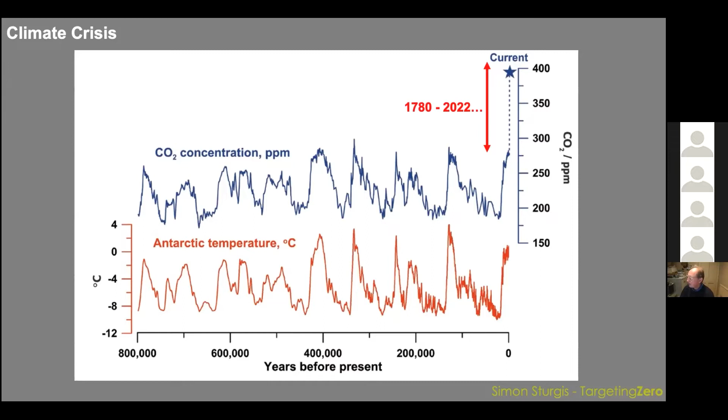So you can see why there is genuine concern, and why we're having the things that we're having happen, because CO2 is out of control, and it therefore seems likely that temperature is going to be out of control. So the objectives of COP to try and stay within 1.5 degrees are extremely serious and are linked to carbon. As I showed you from that picture, this goes back to the Industrial Revolution.

So what is interesting is you look at this magazine here, which says Extinction on the cover. And if you read down below that, it says what's now at stake is nothing less than everything.

COP26 cannot become another vanity exercise, because hope is eternal, but time is not.

Now, the interesting thing is that this is not something published by Extinction Rebellion. This is published by the Financial Times Weekend magazine. For those not in financial services, the Financial Times is published as a weekday newspaper on pink paper, but it's read by the financial services industry, by people at the top of governments and finance ministries. This article was only about 11 days ago, 31st of October.

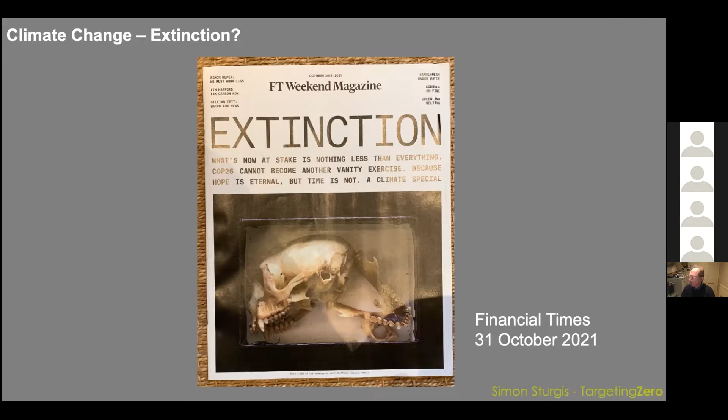And then this is also from the Financial Times. It says, 'We can't get to net zero by flipping a green switch. We need to rewire our entire economies.' This was said by Mark Carney, who was governor of the Bank of England, so he was in charge of all our money. If he's the arch money man, capitalist, whatever you want to call him, he is saying we need to rewire our entire economies.

What does that mean? For me, it means the model on which our society works from an economic perspective is broken. It's not just people like Extinction Rebellion pointing this out, and this is not somebody from the left of politics. This is a central banker, the man who is running our money, saying we need to rewire our entire economies.

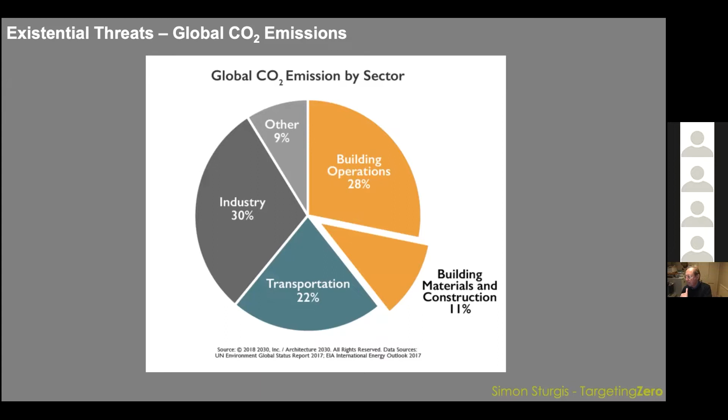And of course, the people behind Insulate Britain are trying to do their best in terms of fixing these kinds of issues, particularly building operations.

Now, one of the things I'm involved with is the Whole Life Carbon Network, which I chair. It's a group of people. What we've done recently is try to define what net zero means. We've produced definitions, trying to get better consistency in whole life carbon reporting. And that is leading to the Royal Institution of Chartered Surveyors' whole life carbon assessment in the built environment document produced by the RICS, which is in the process of being updated.

And what this is all about is improving the way we calculate embodied carbon, whole life carbon. And of course, if you measure something, you can then understand how you reduce it.

That is the objective. So what is net zero? A net zero carbon asset or building is one where the sum total of all asset-related greenhouse gas emissions, both operational (energy) and embodied (materials), are minimized, meet local carbon, energy, and water targets, and with residual offsets equal zero.

So what this is saying is all carbon emissions related to building need to be brought down, and then with residual offsetting equals zero. I'm going to come back to that residual offsetting thing.

So if you look at this diagram, on the left you can see the makeup of a building, the energy and carbon emissions over a 60-year period. You've got primary structure at the bottom in dark blue, services in red, then cladding, interior fit-out, and energy in use. All of that added together is what it costs over 60 years in terms of carbon emissions.

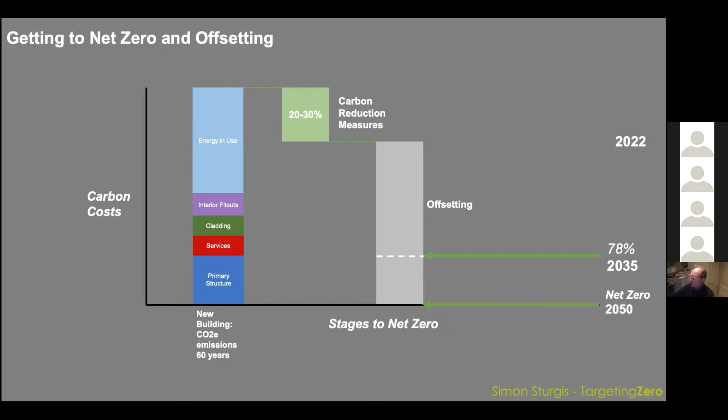But what this is also saying is that if you get that 20 to 30%, which is quite a small proportion of the total column, the rest is offsetting. By 2035, on the right, you can see 78% of that gray column has got to be offset, and the full amount has got to be offset by 2050. So that's a lot of offsetting.

But if you look at these people, these are the Indigenous Environmental Network. They are not happy about carbon offsetting because carbon offsetting has a lot of consequences. It's also, in a sense, ducking the problem, in my view. There are people who sell carbon offsets who have very good explanations as to why it's a good thing, but I think it's to some extent masking the problem.

And if we take account of what the Indigenous people and others are concerned about, we should be really carefully thinking about recommending offsetting in any way.

And this is what came up after the First World War. So within only a few years of that, within a decade of the end of the First World War approximately, you're getting a new architecture which is radically different. I'll come on to a slide which explains it, but it's very different from the previous architecture, the pre-First World War architecture, the end of the 19th century. And that architecture evidenced in these images has really come out of the demands of the day.

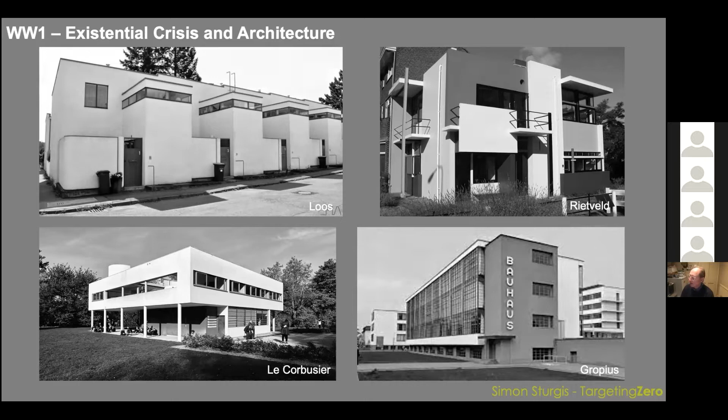And of course, you could say that today, the consequence of climate change is leading to the kind of destruction we're starting to see, that is beginning to mirror - not necessarily as extensively, but potentially far worse than what happened during either of those two wars.

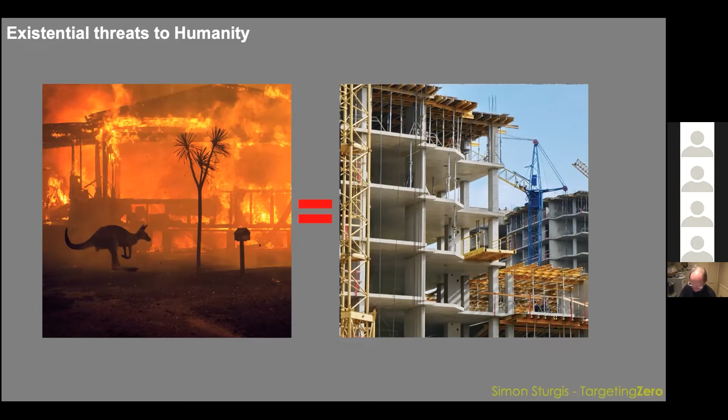And if I go one step further, what this is saying is that the construction we're having today is contributing to climate change, and is directly contributing to what's happening in the image on the right, which is contributing to what's happening in the image on the left. And therefore, you can make the direct correlation that building buildings is not dissimilar, in terms of existential threat to humanity, to driving a bomber.

That may seem a bit extreme, but I think you can draw parallels given the fact that construction and the built environment is responsible for something like 40% of global emissions. It is not an unreasonable point to make that there is an equivalence, if you like.

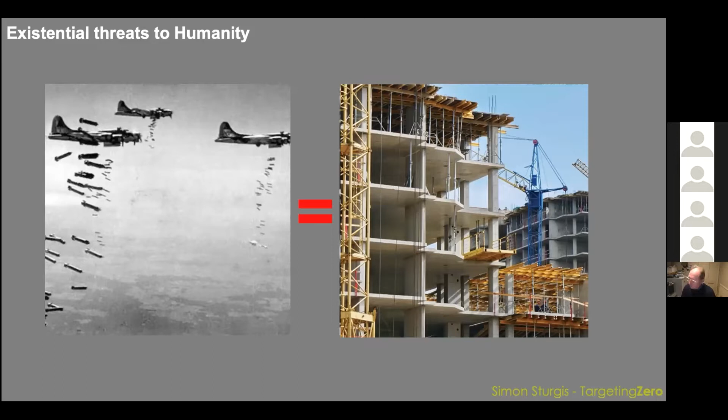I know I'm stretching a point and collecting up dots that are loosely affiliated, but I think there is a point to be made that the seriousness of this is such that there is a level of equivalence. And if you look at the nature of the problem, global construction from 2020 to 2060 - so for the next 40 years - is equivalent to one new Greater Manchester every 9 weeks. That is a phenomenal amount of construction, and that's what we're having to deal with.

Now, you might say we have to put a stop to that. But yes, we have to retrofit - I'll come on to the retrofit issue in a minute. I think we also have to recognize that population is growing, whether we like it or not, and population is part of the problem. Consumption is growing, and people need to be housed, people need somewhere to go and work, and so on. So whether we like it or not, buildings are going to continue to be built, although, as I say, we want to be retrofitting. So what do we do?

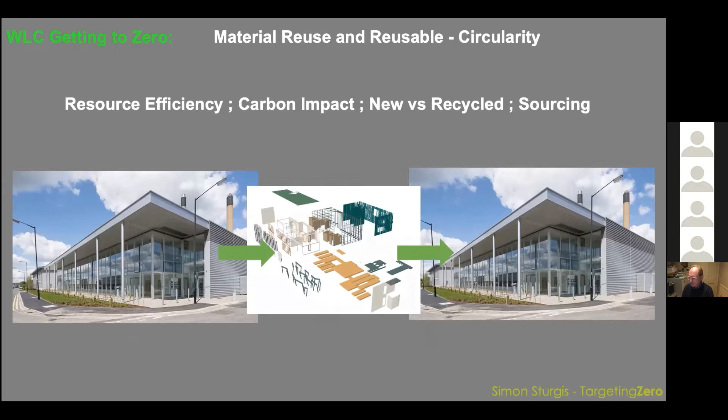Now, if you anodize aluminium, you have to have virgin aluminium. It has to come from a mine, a bauxite mine, somewhere like Australia or wherever, because if you use recycled aluminium for anodizing, you tend to get colour variations and so on. So what I'm making the point here is that something as simple as a coating, a choice of coating, can make a difference to what the substrate is, and therefore whether something's recyclable or recycled or not.

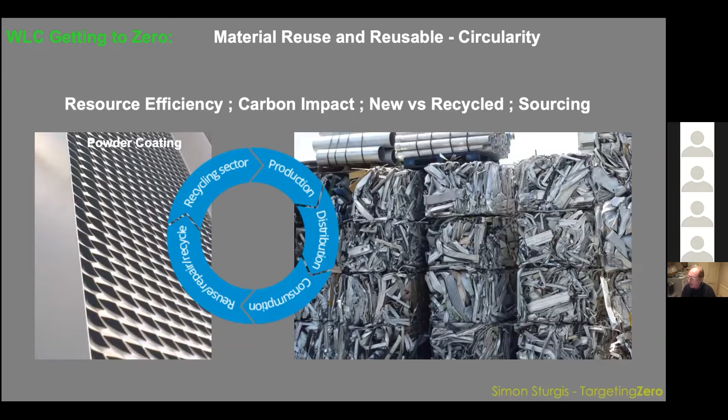So it is really important to think about this holistically again. It's not just about the finish, it's also about how you get there. I thought I'd just show you two things I'm involved with.

And there's a clear case to be made. But people have to change their mindset, and it comes back to that point about changing the economic model. We also need to change our mindset about these sort of things.

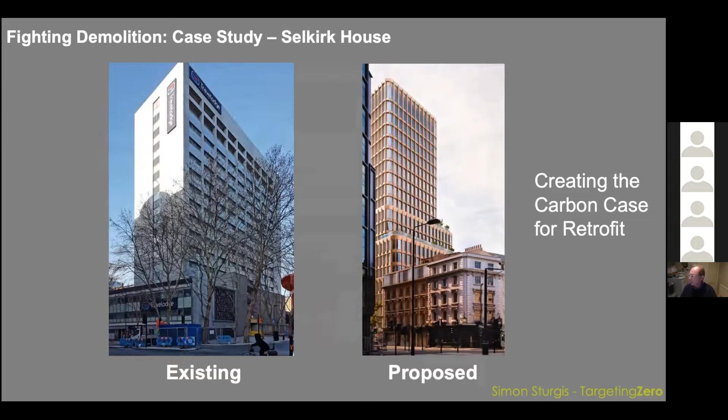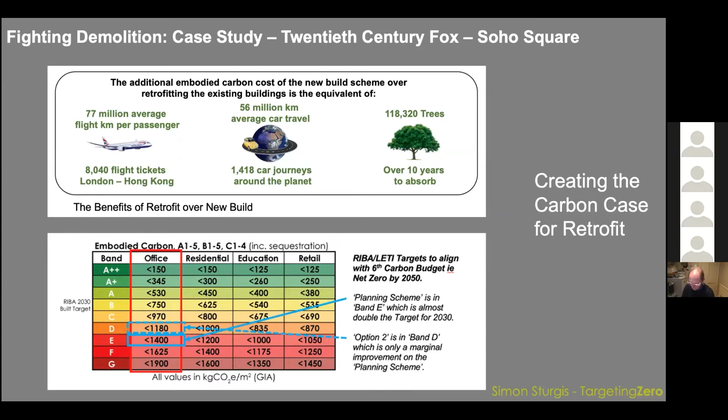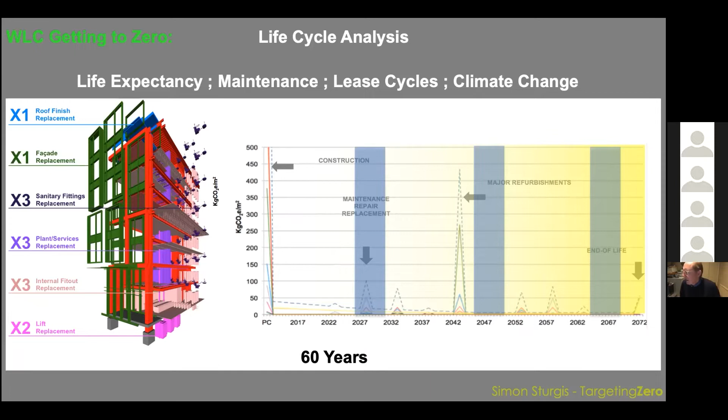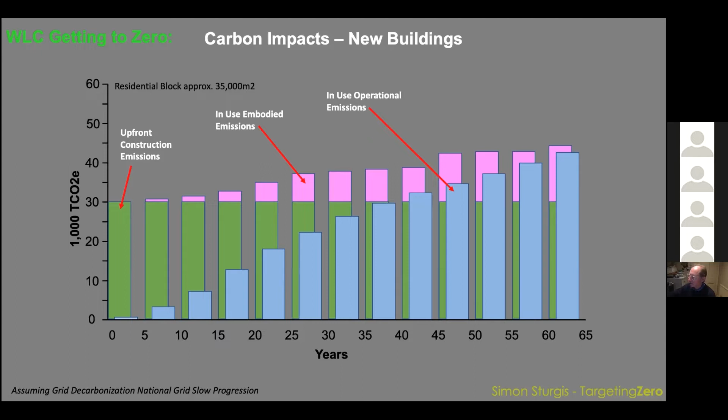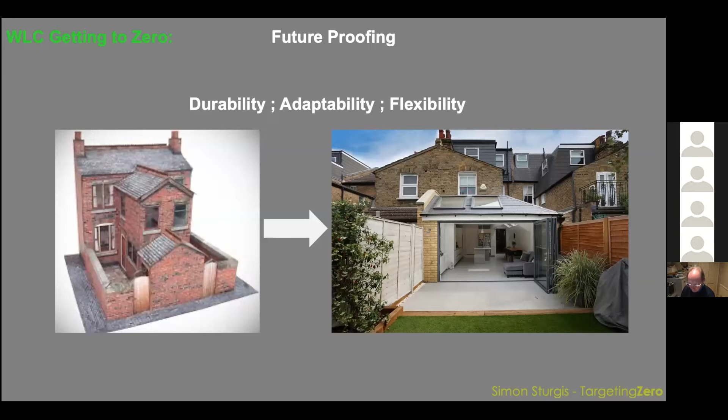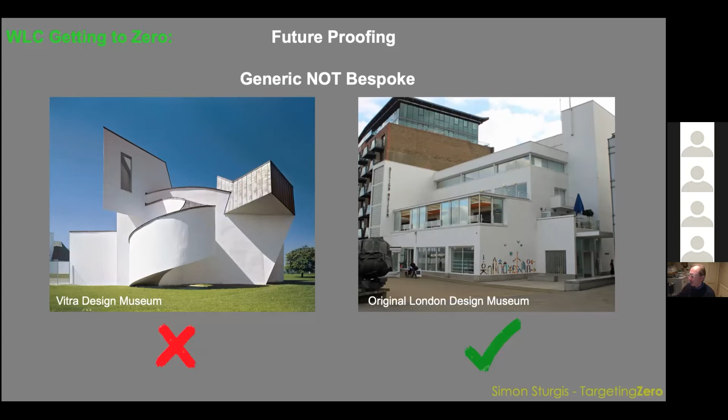That's pretty impressive - how many current or recently built housing schemes would be expected to last that amount of time? This is another point really making the case that we should be designing buildings capable of adaptation to other uses. So whilst the building on the left might be winning prizes and things, actually it's probably pretty useless for anything other than a design museum. The one on the right is a design museum too, but it's capable of being used because it's pretty simple boxy construction - it can be used as almost anything, changed into a variety of different uses. I think that's quite an important thought.

Material use. This is making the point that we're building these buildings on the right there with 3 sheets of glass, complex glazed facades, which only last about 30 to 40 years, because double glazed units and laminated glass do not last very long. Whereas a brick facade is an expensive carbon thing to make, thinking of that step graph I showed you, but on the other hand it does last for a long time. So unfortunately there's no easy instant solution - all of these things require balancing out different things.

Now, the one on the left, I happen to know, has a timber frame, a completely timber CLT internal skin. So it starts off as a timber building, and then they wrap it up in brickwork. That helps to some extent.

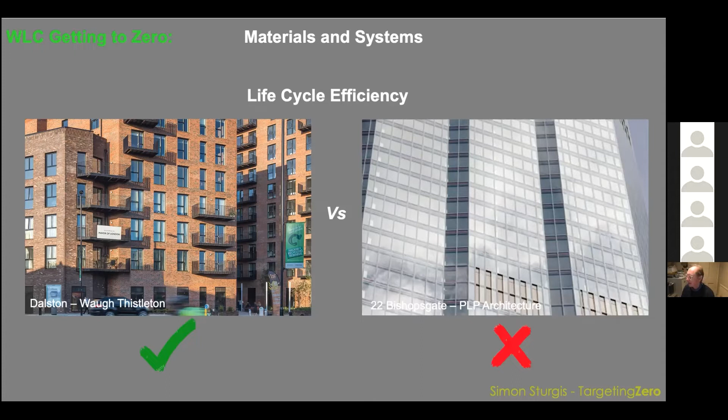Methods of construction - this is showing modularity and so on, and the ability to disassemble is important. But some modular construction can be useful and have good things, but doesn't always. So unfortunately you have to do your assessments and figure these things out.

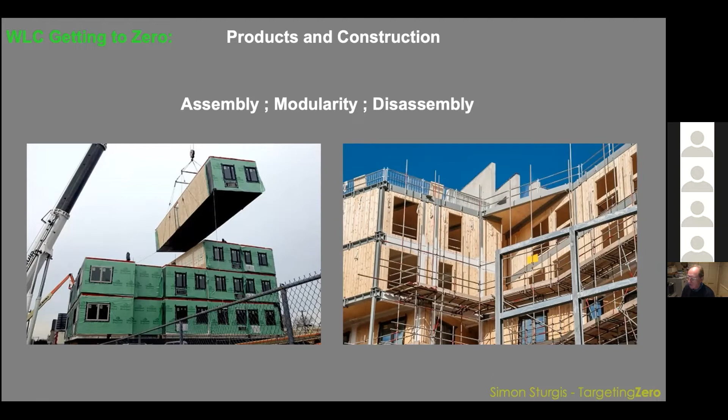Holistic thinking. This is really about not just the performance of something, but also about the carbon cost of it and the life cycle. The form and complicated shapes lose heat and cost a lot more in terms of carbon. This one is really about natural ventilation - the combination of materials and energy in a building, it's not just about the energy, it's not just about the materials, it's how those two things interrelate.

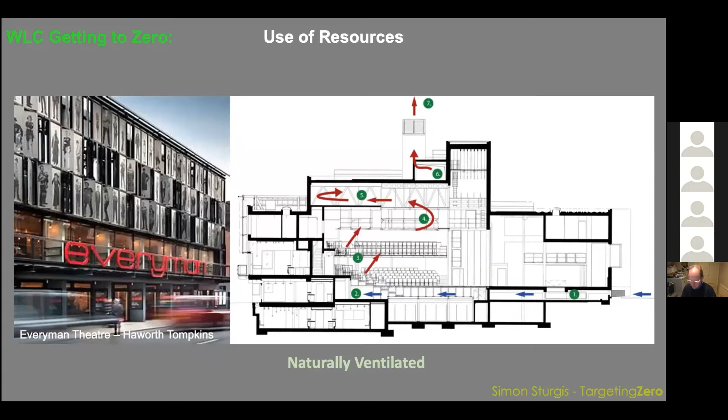So this point here - I'm moving on because I know time is ticking, and I've got just a few more to do, not too many slides, 4 or 5. So this one is actually the Google headquarters in London, which I was involved with.

What's interesting about this is that we found on virtually every single tender package that the carbon cost and the financial cost were the same package. In other words, there isn't a problem with embodied carbon being wildly expensive - it's just not the case. It is the case that there is a correlation between - I wouldn't say it's 100%, but it's a clear indication that carbon and money follow each other around. If something's expensive, then it's probably high carbon. If it's cheap - well, cheap's a bad word to use - if it's inexpensive, maybe it's not so bad.

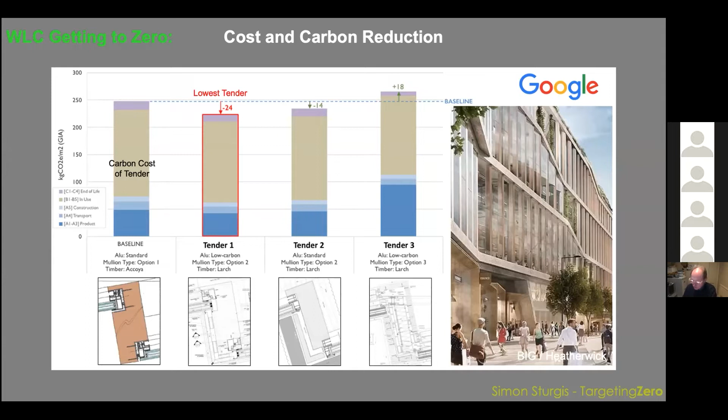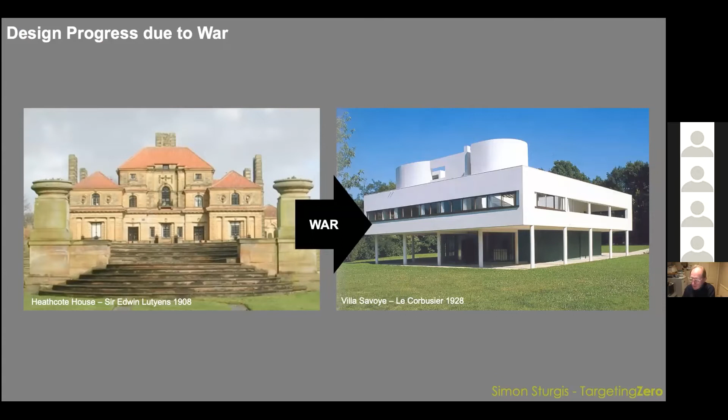But if you look at architecture today, for the last 65 years, if you look at these 3 buildings - the one on the left, 1955, has a single skin facade. The one in the middle has double skin or double glazed units, a double skin facade. And the one on the right is 3 sheets of glass. So does that represent exciting innovation and change?

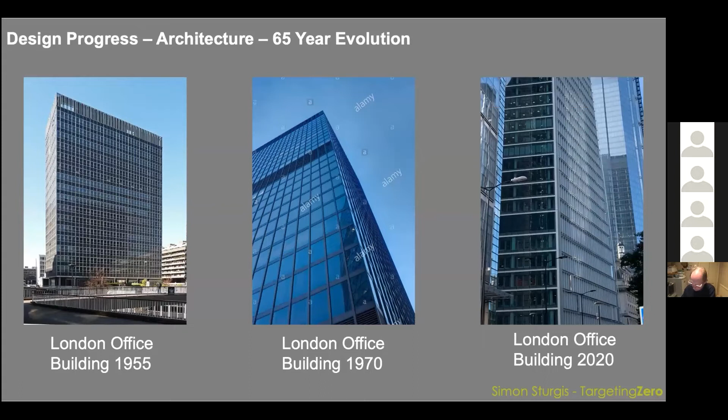I would argue that maybe all of those are obsolete under today's climate crisis. If you look at a camera from the same period, 1955, 1970, 2020, you've got a huge evolution in thinking. My question is, why aren't architects doing the same thing? Why haven't we evolved to the same extent?

Interestingly enough, just a side point, the camera on the right has the same computing power as the whole of Europe did in 1955. So that's an expression of progress which is not happening, I don't believe, in the same way in architecture. So this is my second from last slide, and it was my last proper slide, I suppose.

So this is really saying, well, what is the architecture we should be having for the climate crisis? What will it produce? Is it going to be a significant amount of retrofit? It should be — we should be reusing a lot more buildings. But what is it going to be otherwise?

Is it like the Cork House, or Architype's Enterprise Centre on the bottom left, which are being very innovative with materials, very low carbon? Interestingly enough, that thatch wall probably has a similar lifespan to an aluminium panel, which is extraordinary to think about. And the one on the right, Haworth Tompkins, is a combination of retrofit, reuse, recycling, and new construction.

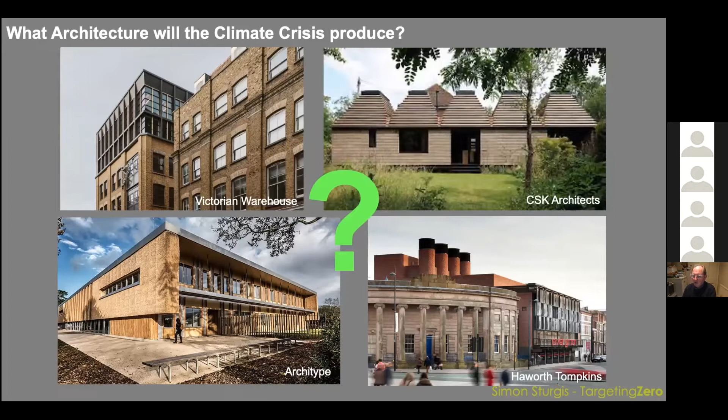Thank you so much, Simon. Amazing presentation — a little bit scary, which maybe it should also be, to see that we haven't really properly learned out of anything, and the buildings kind of all look the same in a way, and don't really function. I do have a question for you.

It does seem, like you said already, in terms of the cladding and everything, that it's a very thin line between what is recyclable, sustainable, carbon neutral. Would you say that's one of the reasons, together with economic factors and also maybe the modern aesthetic, which makes it so difficult for people and architects to wrap their heads around — has sustainability become too complicated to implement and also uphold?

Yeah, I think that's a very good question. I think there's a learning curve going on, and at the moment most architects — and I'd include the sponsors of this session in this — don't really understand what carbon assessment is all about.

It's actually not enormously complicated in practice, because what you're doing is taking material quantities from a QS cost plan, multiplying them by a carbon factor, and saying that's what it is. That's a simplification, but for example Feilden Clegg Bradley Studios will give you free software, or a free Excel spreadsheet from their website. It's worth downloading that and just messing about with it, because it'll give you an understanding.